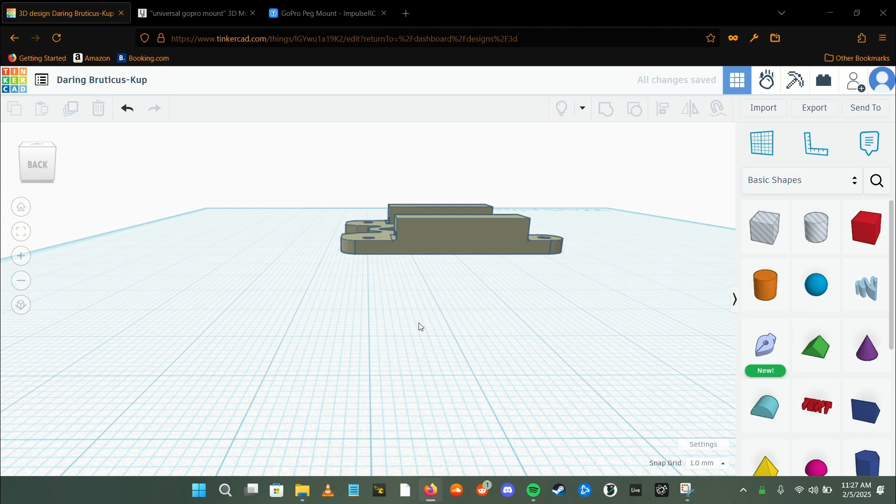Alright, we're in TinkerCAD. Just trying to find the best way to look at the file I've already uploaded.

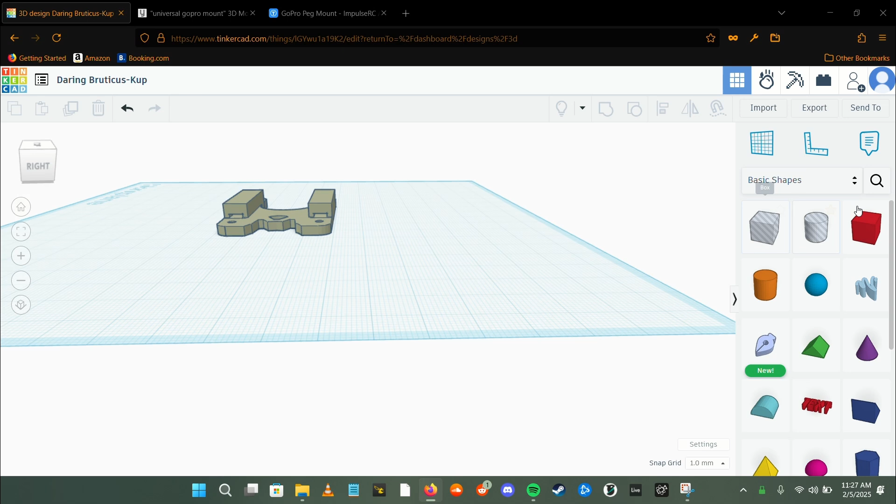I've found a mount for a camera for the TBS Source 1v3, which is what I'm trying to remix a universal GoPro mount for. So here we're going to use this lined box shape, which is like a hole, as you can see. It's like a negative shape, and we're going to size it out to delete the parts that we don't want, just make it big enough to cover everything, and then move it appropriately.

So you can take a look at a few different angles. That looks like it works out pretty well.

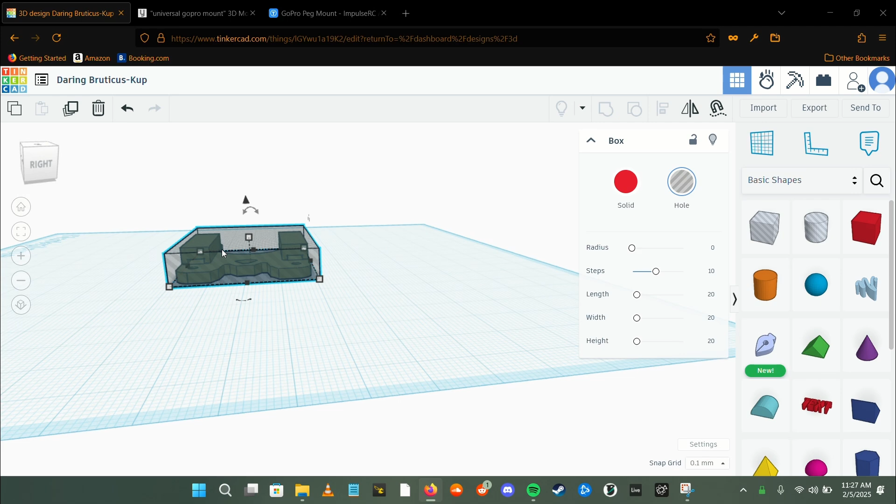Before we do anything, we're going to change the units of measure to 0.1 millimeters, so you can move it just a little bit at a time.

You want to make sure you highlight only the parts you want to delete with this shape, and take your time doing so.

The 0.1 millimeter step is about the best snap to grid setting that you can get on here. So I like this, I think.

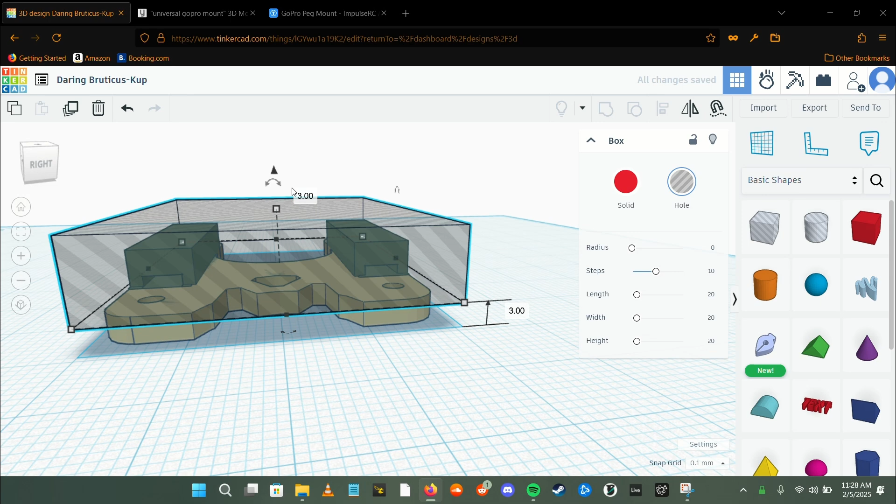Select everything and click this button here to combine the shapes. It's called group, and that will effectively delete what you don't want.

So then we'll go up to the mount that we want to remix it to. I've got a universal GoPro mount typed into Yeggi, and I like this ImpulseRC one. Looks low profile compared to the GEPRC one right there, so I'm gonna use that.

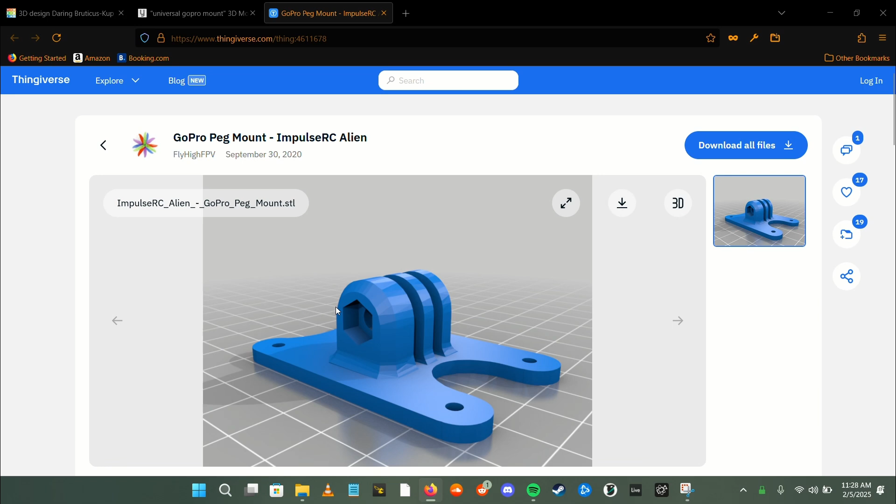This is on Thingiverse. If you click this, it'll give you a zip file with all the data basically here, but I don't want that. I'm just gonna cut it apart. So you go down here, you can just get the file in your downloads and then import it to TinkerCAD. So there we go.

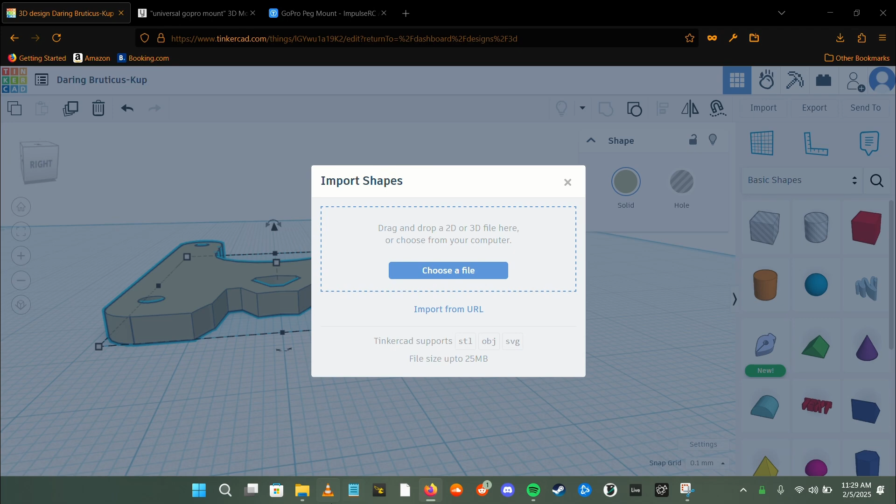And we're going to do the same thing to this mount, but in reverse. We're going to keep the top sections and delete the base part. So we'll just wait for it to import.

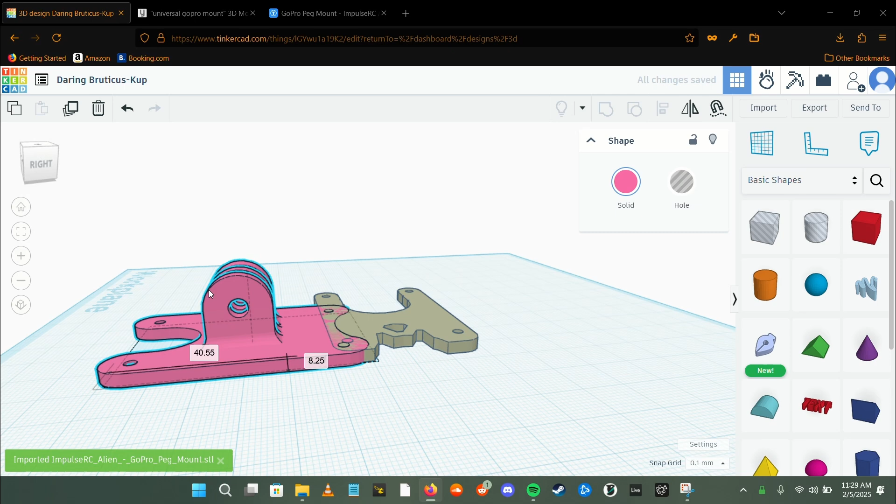Okay, so as you can imagine, we make a shallow box, and then group these two shapes together, and then we're going to put what we cut from this mount onto the other one.

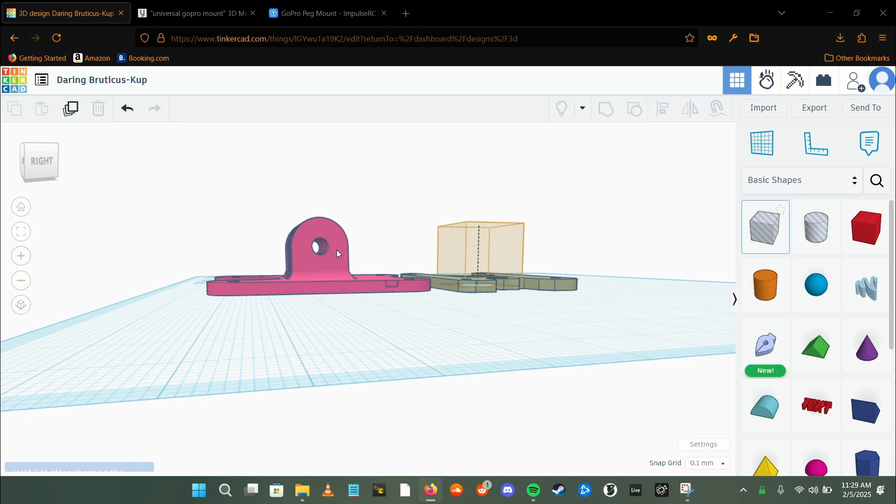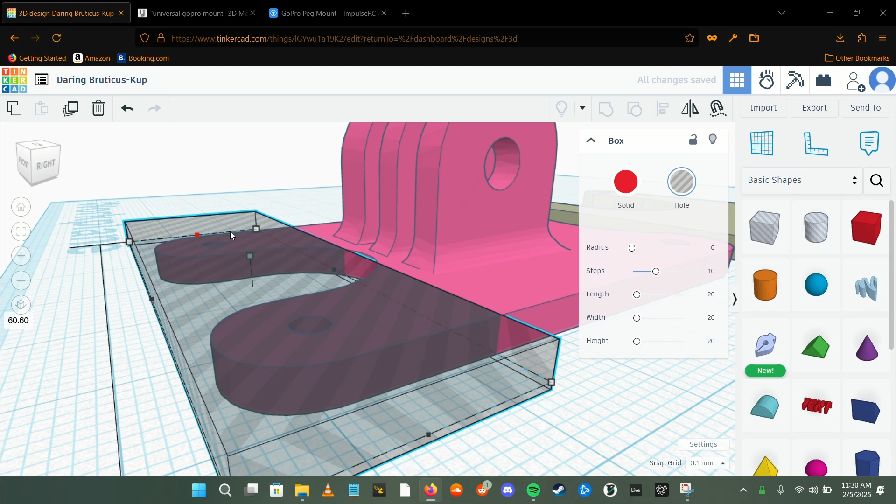I like to put the shape on top of what you want to cut, and then use that same kind of eyeball technique to size it appropriately. You can find that there's just like one grid snap that will highlight exactly what you need, or really close to it. So just try to find that, and then size it to the rest of the mount.

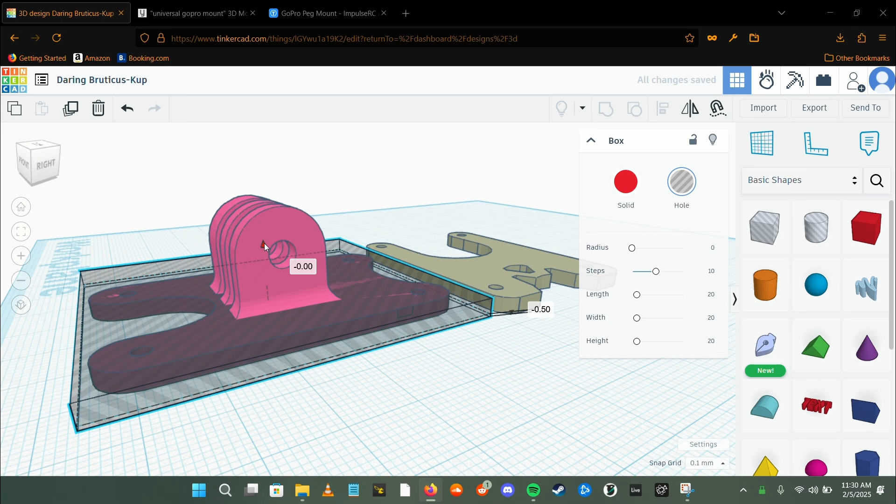This can get a little tricky when you're doing GoPro mounts, like fixed mounts, but if you take your time, you'll figure it out. It's just a process of shaping that box, or whatever shape it is that you want to cut with, and moving it around to the best of your ability.

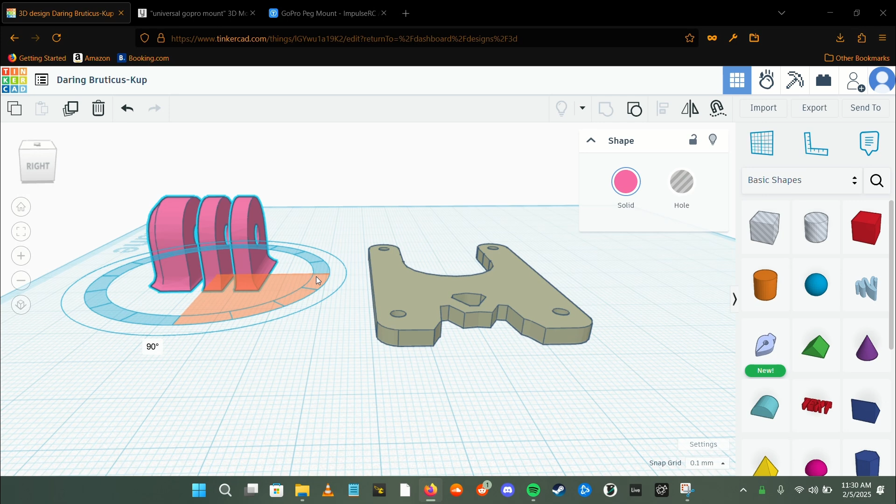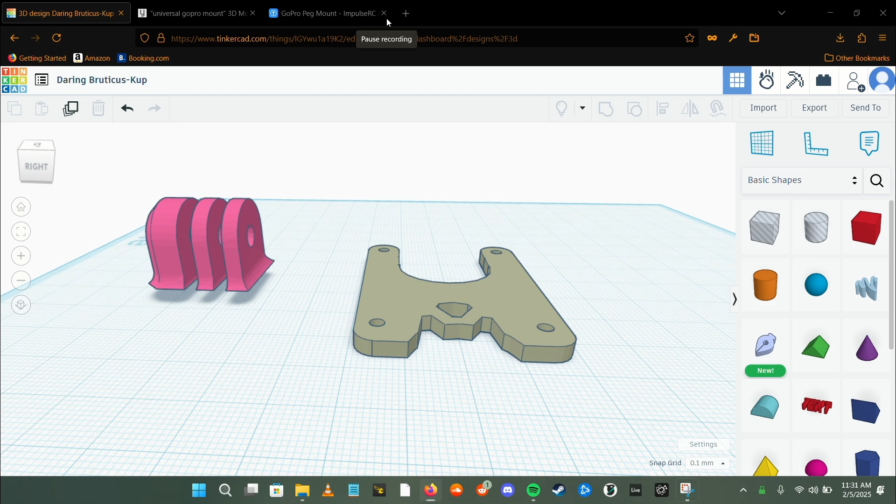This is an important part, because I've done this a couple times where I didn't pay close enough attention to which direction the parts are going. The hardware hole is on one side, and there's a blank side for your screw or bolt. There's also a front and back side to the bottom base of the mount, so make sure you match them up appropriately. If you need to check or use something as reference, please do, because you'll be really frustrated like me.

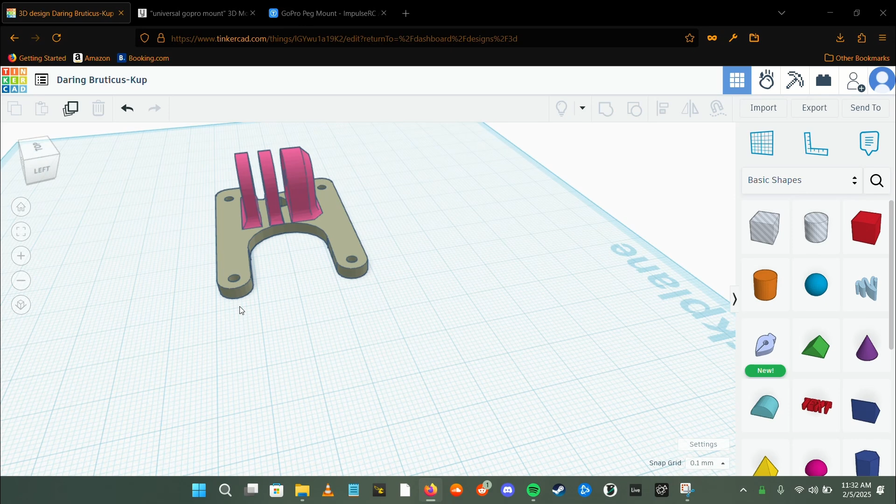If you print this whole thing and find out you did it backwards, that's frustrating. Now getting this on the right part of the mount is kind of an eyeball game. TinkerCAD isn't the most precise for measuring, and I wouldn't suggest making critical components this way, but it works great for making camera mounts and pretty much any TPU parts. You can eyeball it pretty dang close.

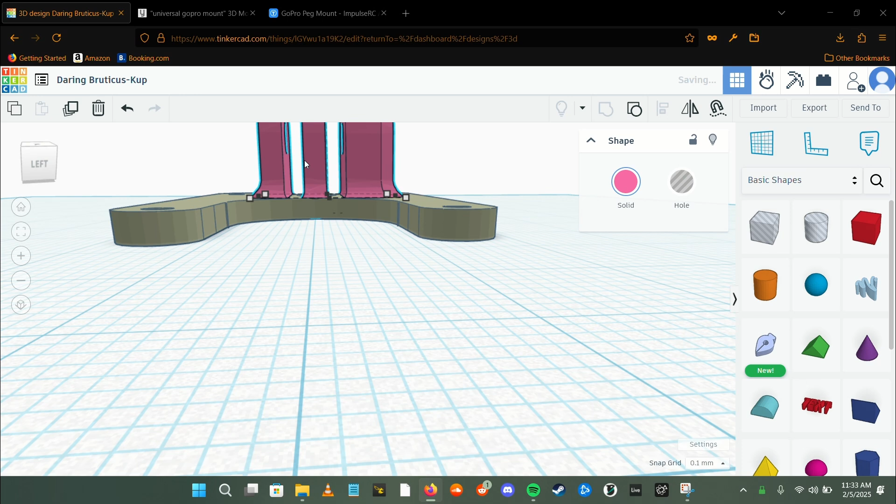I'm just using the base of the mount as a reference and trying to line up the holes to the center as best I can, and I think that's looking pretty good.

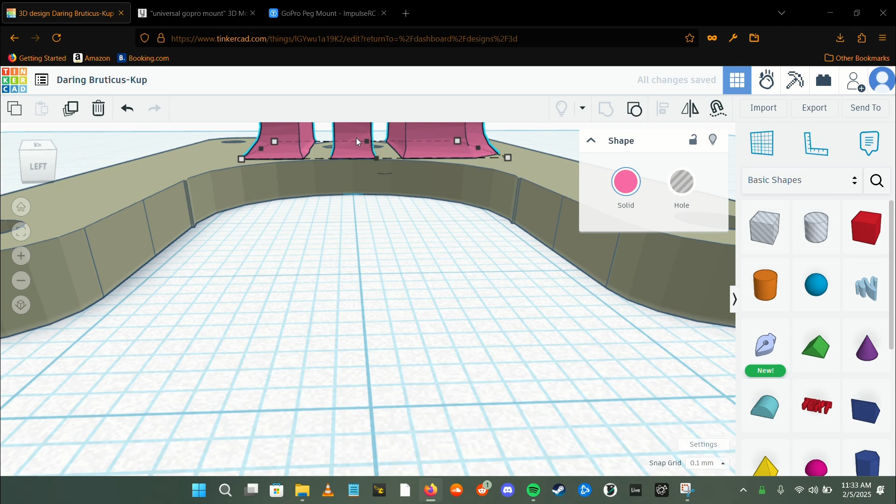If that's good and we've got the hardware on the right side, it doesn't really matter that much for universal GoPro mounts. But if you make a fixed mount and you put the camera backwards or the mount backwards, it's gonna suck. That's 7 hours of printing and filament wasted.

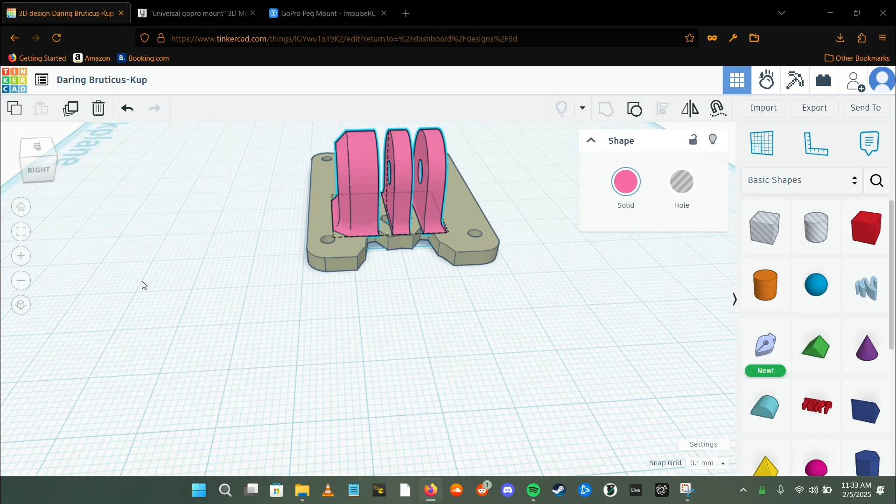So looking at the back side here, I'm going to fill in some of that open area because I want the mount to be as strong as possible. We'll use a regular box shape and the same technique to size it to the rest of the mount to get the thickness right, then size the perimeter of the shape and slide it into place.

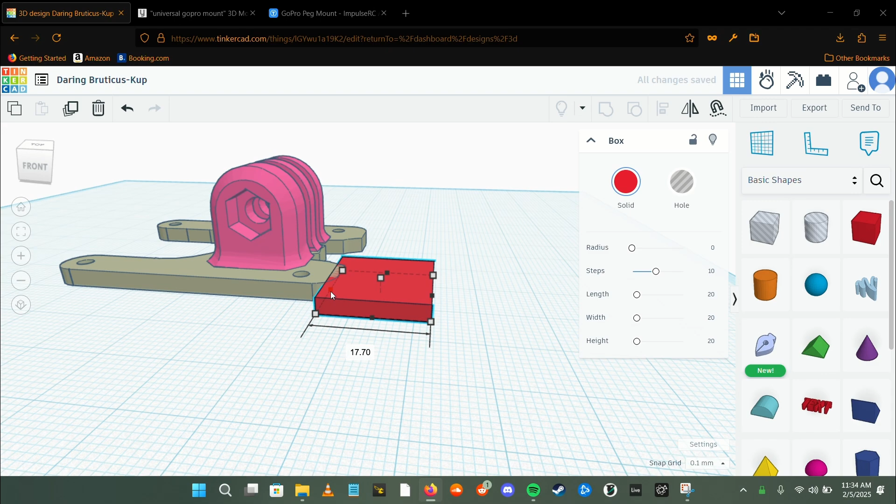That looks pretty good. It'll cover the inside holes, and I think I'll extend the face closest to us outward a little bit.

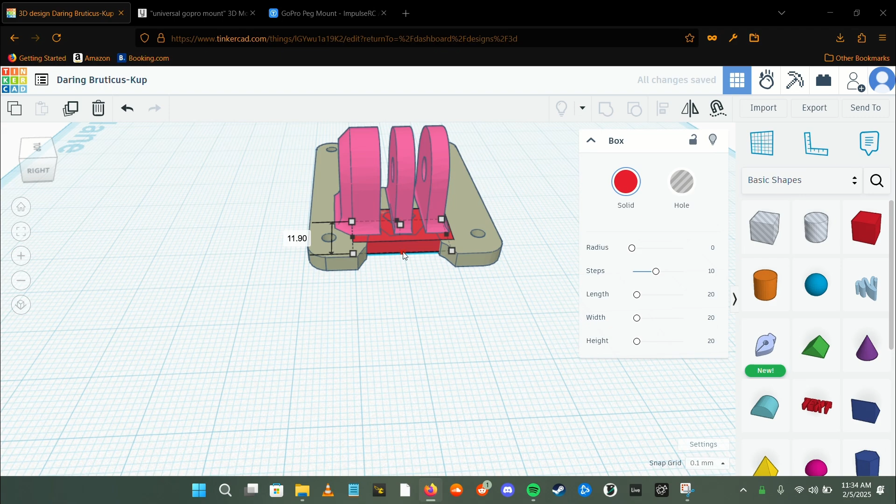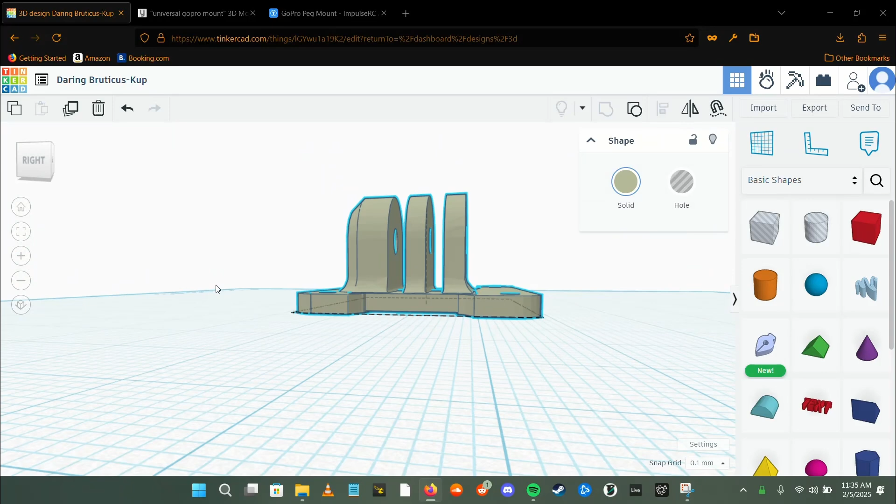Alright, I think that looks pretty good. Last but not least, we're going to group everything together just like we did before. Since these are solid shapes, they'll all turn the same color, and you should be done. Take one more peek, make sure everything's good, and then export it. It should go right into your downloads folder from Tinkercad.

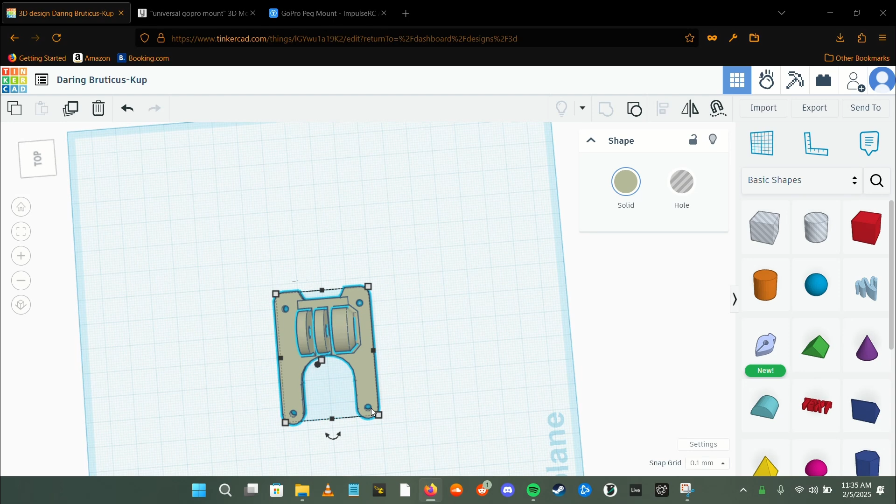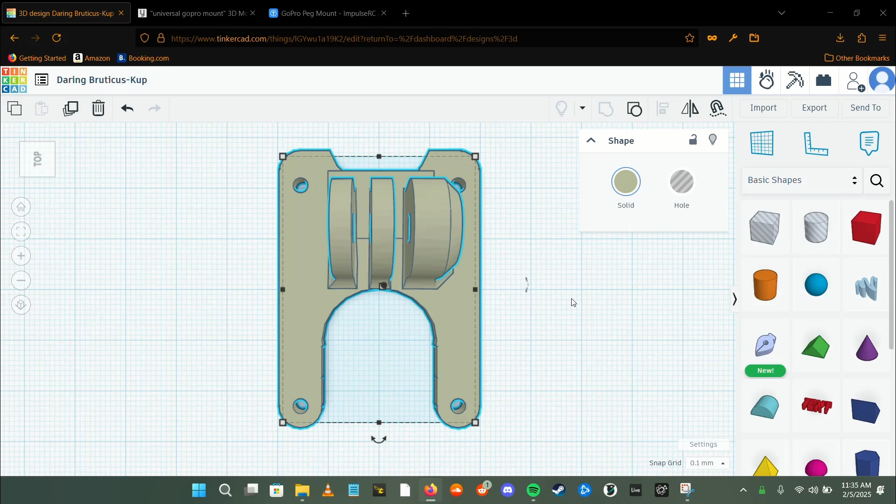I will probably do a Fusion 360 introductory tutorial for FPV stuff, but it's much harder to remix in Fusion 360, and honestly I wouldn't recommend it if you just want to make your own mount for one thing—it's not worth the effort. But if you're designing from scratch and need to make special parts for your quad, that might be the answer. So that's why we're going to do a little design tutorial with some 3D printing mixed in too.

Alright, that's it. It's not too hard to do this. It might take a little bit of practice—remix some stuff, and if it doesn't turn out alright, that's kind of the path to learning here.

I still have a GoPro mount for my Nazgul where I accidentally put the base on backwards and printed the whole thing, and I keep it as a reminder not to do that in the future. One of those learning mistakes.